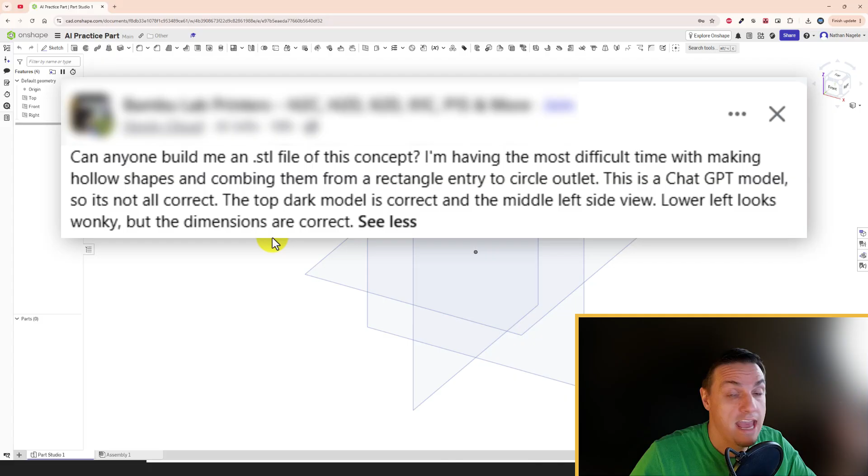Hey folks, I was in a 3D printing forum earlier and I saw somebody who posted an AI generated design, but they needed help creating it or making it go into the actual 3D printer. So we're going to look at the design, work on making it inside of Onshape, and go over some of the issues AI has when generating this stuff, but more importantly, how it can be used. I have a video coming about that next week as well. So let's jump into this and take a look at what's going on here.

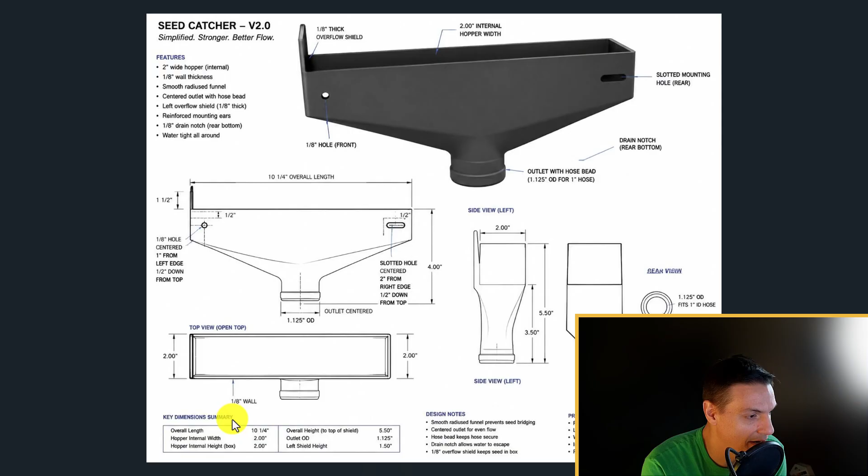Okay, so this is what it is. It's a seed catcher version 2. I don't know what it's for, it's obviously to catch seeds, but we need to take a look at a couple things to get started. Down here on the bottom it has the general dimensions: 10 1/4 inches overall. They say length, I would prefer width. The depth is 2 inches and the height is 2 inches. I'm also not a big fan of generating stuff that has fractional and decimal dimensions mixed. Keep it one or the other. It's a little interesting to see.

Overall the design, the 3D model, looks awesome, the generated thing, but there are some things we need to take a look at. First off, this picture is showing that this is a through hole. It's not indicated anywhere on the drawing that it's a through hole.

Secondly, we have our layout here. So this is supposed to be our front view. Below our front view is our top view, which is not correct. And then we have our left side view here, which really should be our right side view and should be in line with this. And then this is our rear view, and I don't know what that is or how that's actually the rear, because the rear view should be a mirror image of basically this thing. So that part's a little messed up.

The other issue we have here is this top view. This tube, according to the top view, shoots out towards the front of the object, and that's not the case. So we're going to go through the process of making this thing inside of Onshape. It's not terribly difficult, but we'll make sure we get it all solved here.

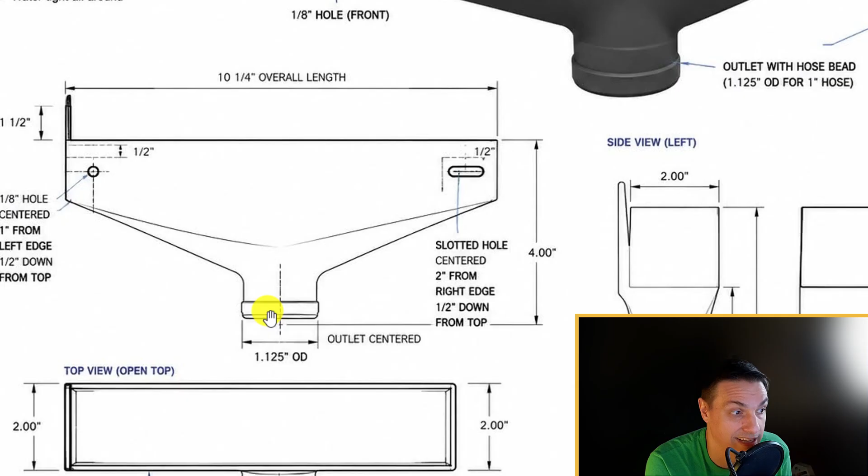Now, to start off with, before we do anything, we're going to break this down to basic shapes that we need to have, and then once we have the basic shapes, it gets a whole lot easier. If we take this as its most basic format, we're going to have a rectangle over in this area, and then the bottom area is going to be a circle or a cylinder. That's about all the stuff we need to have this thing set to begin with. We'll merge those shapes and get everything working, not a big deal.

But let's jump back over to Onshape, and we're going to flip back and forth between this and the other things quite often. Let's jump over to Onshape first here.

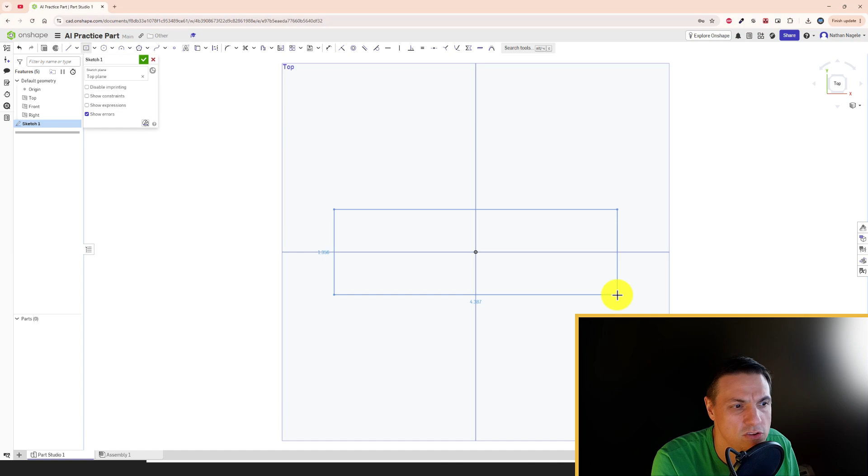All right, so the first thing we're going to do inside of Onshape, we're going to start off with Sketch, go to our top view, and rotate over to the top. I'm going to hit G for rectangle, or I might even hit R. R is a center point rectangle. It just helps keep things on the origin, which may be useful for us later. It's not super important, but I'm going to do it anyway. So we said it was 10 1/4 or 10.25 and 2 inches.

Going back into our drawing, that's what we have. 10 1/4 is the overall width, and the overall depth from front to back is 2 inches. And that's great. If we take a look here, we have the height of where this transition starts all the way down. They're not in proportion with each other of where this is showing it at and where that is. So we have to make a little bit of guesswork here. We see that the total height is supposed to be 5.5 inches, but that's not including this, which this one is including that. So again, there's a little bit of play in there that we'll have to make some assumptions or changes with.

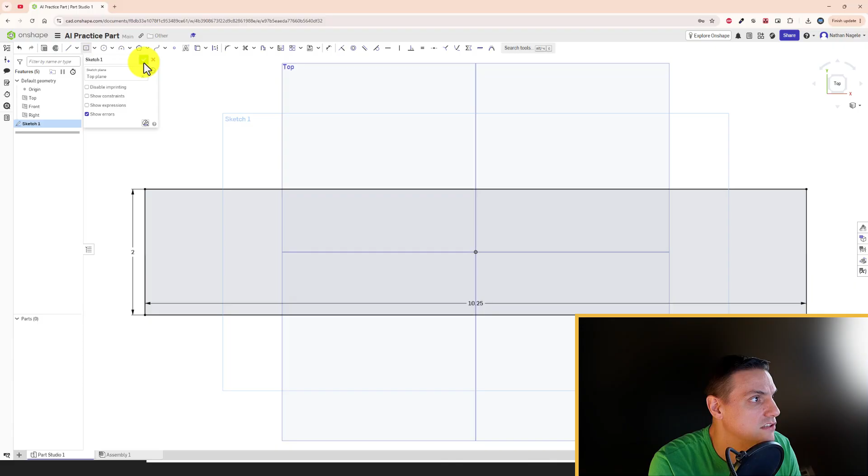But I'm going to say, if we have this as being 1.5 inches, and from here all the way to the bottom is supposed to be 4, basically we're going to have this thing go down to this area and then go beyond that. We have work to do. So I'm going to just make some assumptions. I'm going to say this is probably, if we take a look in proportion, 1.5 inches. So this is probably about 2 inches. So we're going to extrude that 2 inches, and then we're going to try to figure out what to do with this next part. So I'll hit my green check, go to extrude, click on my closed loop, which will turn gray.

And then I'll type in 2 for the inches and hit my green check mark. Now I'm going to turn off the different views here, or the work planes, because it's just going to be easier for me to work with them off right now.

The next thing we're going to do, we need to make that circle coming off of the bottom. We know from the top of this to the bottom of that it's supposed to be 4 inches. So we're going to make a work plane that from the top down to here is 4 inches away, and we'll draw our circle on the origin. That circle is going to have a diameter of 1 1/8 of an inch. So we'll get that going, and then figure out how high that's supposed to be up, and figure out the rest of it here in a second. But let's go ahead first with the work plane.

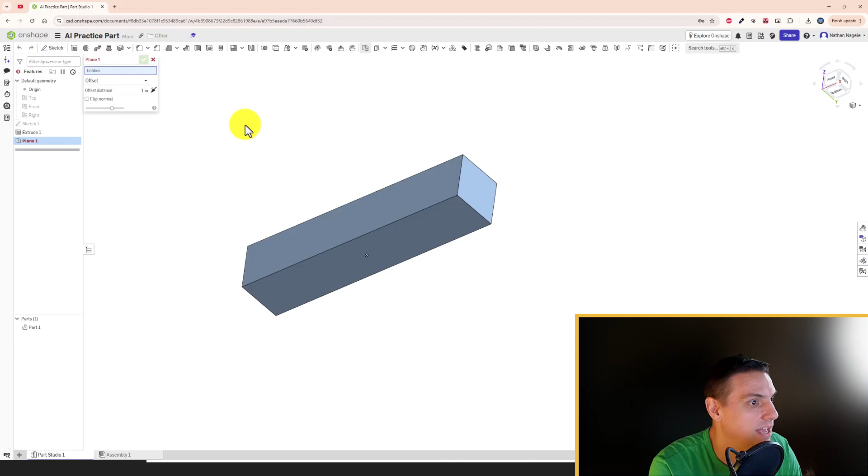We're going to go to plane, and then we have offset. I'm going to go from the top. We're going to change direction with the black arrow, and we would say that wants to be 4 inches away, just confirming the top to the very bottom is 4. So I'm cool with that. I'll hit my green check, and then we have a work plane.

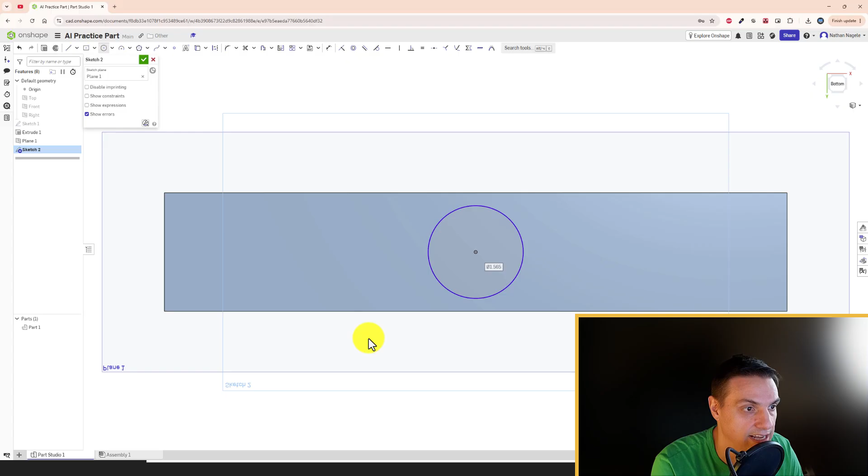Now I'm going to go to Sketch. I'm going to click on plane 1. We'll go to the bottom of the part, and this is why I made this centered on the origin, because then I can just do this, and it's telling us the diameter is 1.125. So 1.125, cool. That already looks visually not correct compared to the size here, but that's the dimensions they gave us with all that. And again, I don't understand this drain notch or any of the other stuff.

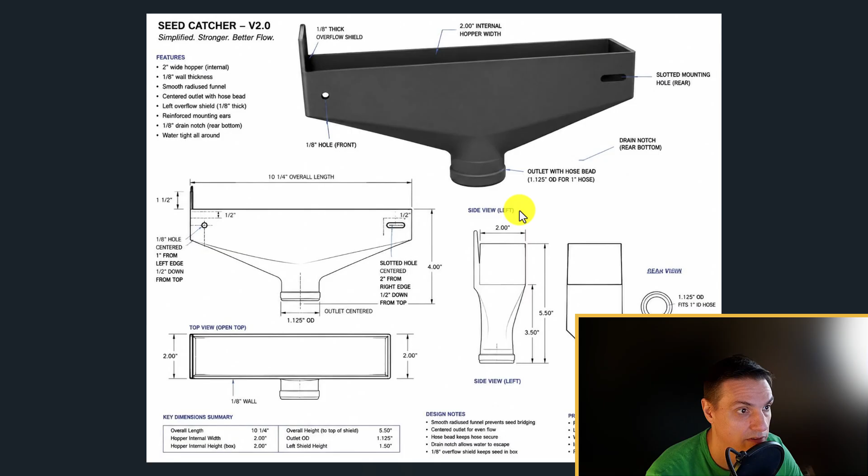So our next step here is figuring out how tall this is before that taper kind of starts. If we take a look here, it has the hose bead. It says it's 1/8 of an inch and 1/8 of an inch. So I'm going to assume each of these is 1/8 of an inch, adding up to 1/4 of an inch that we want to extrude this thing up by. So I'm going to finish my sketch, go to extrude, do that, and I'm going to do 0.25, and we got that. Now it's not perfect, we have some other work to do.

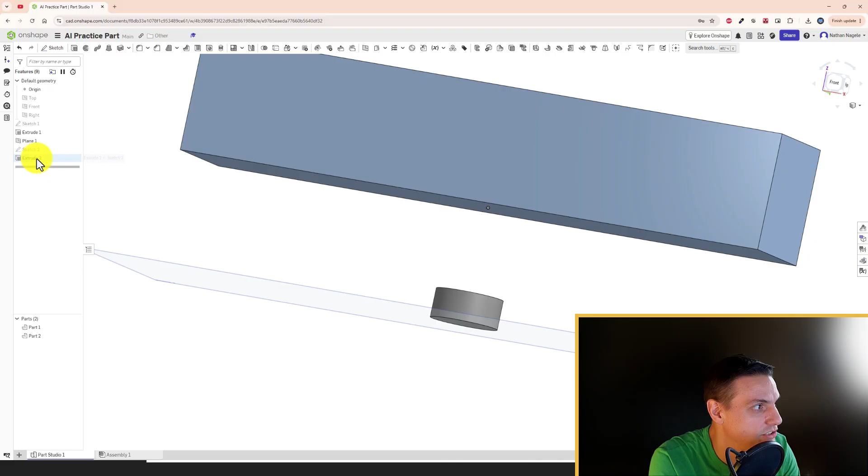And what we could also do, you see how there are 2 different parts, we generate multiple parts. There's other ways around that. I'm going to go back and delete these parts because I want to show you other ways to accomplish this same thing. So I'm going to do the same thing with this, except instead of going 4 inches this time, I'm going to go 3.5. That accounts for the height we're coming up. And the reason I'm doing this is because it helps keep the part more cohesive as we go through and build it. So 1.125, cool.

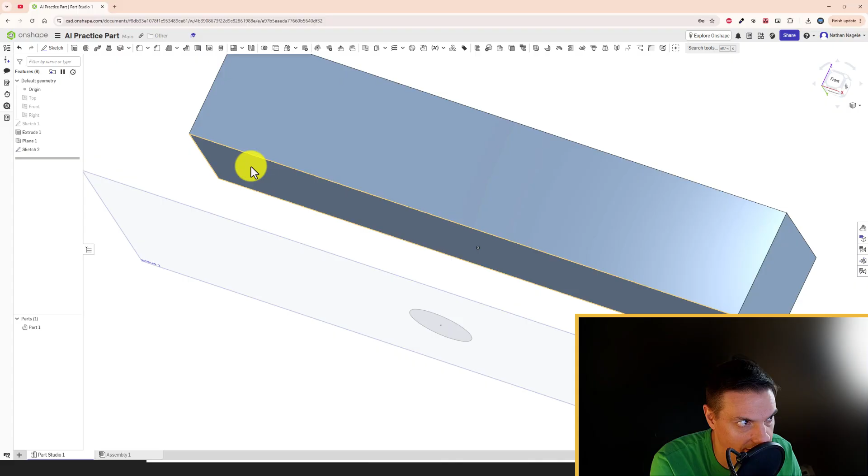Because what we're able to do now is project this rectangle down to that circle, and then continue that circle down farther once we have it in there, which is probably the correct order of operations. This is just one of the things you have to kind of play with when you're going through and working on a drawing that you're not quite sure of.

So to do this, we're going to go to Loft. Loft will be there, we have our profiles. We can just click on the bottom of the part, we don't have to draw anything for that. And then we're going to click on this, and you can see it's going to generate a shape where it merges those guys together. We'll hit our green check mark, and we have that there.

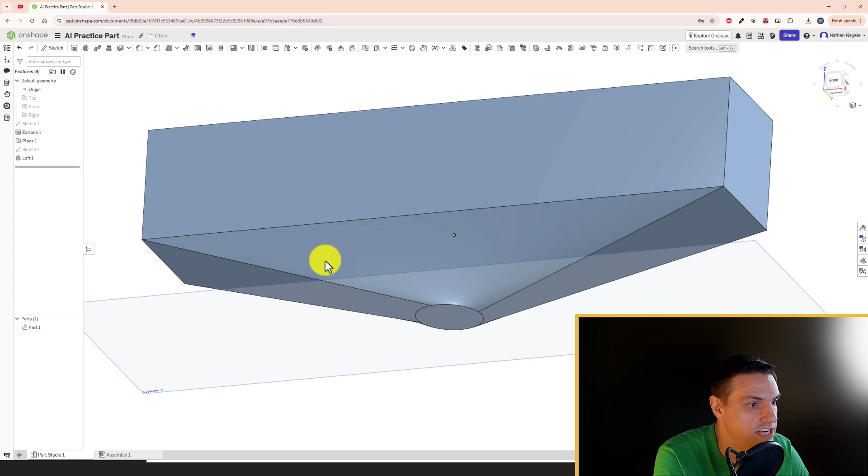Lovely, Bob's your uncle. Let's go ahead back on the sketch. We'll click on this now. We'll click on our circle on the bottom, and we'll get that to go out 1.125. Fantastic. And now I can just extrude this down that 1/2 inch. We still have some more work to do, but that's fine. All right, I'm happy with that as a beginning point.

Let's go back here and take a look at this. So it's supposed to be 1/8 of an inch thick and 1/8 of an inch tall. Okay, a lot of this stuff doesn't give me a lot of information because it says it fits a 1 inch diameter hose. Is that hose supposed to be internal or external? If it's internal, why is there this ribbing here? I don't know what's going on with all that, but I guess we'll figure that out as we go forward.

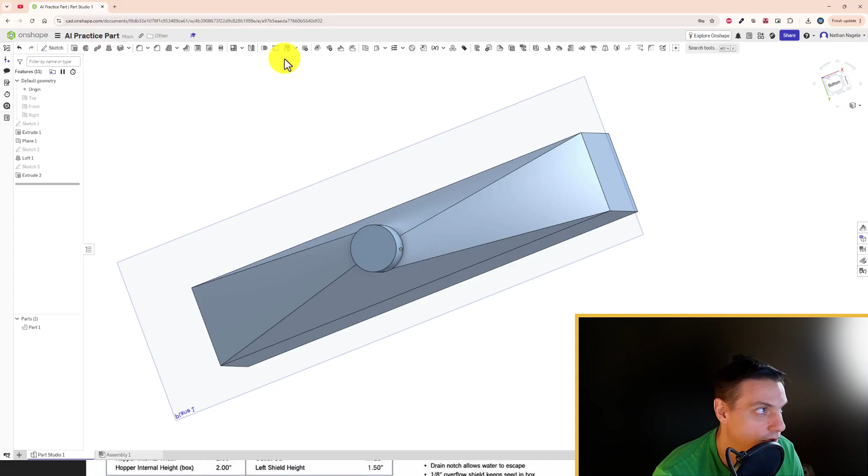So I am now going to sketch on this, go to the bottom again. We're going to do 1.125 plus 0.125.

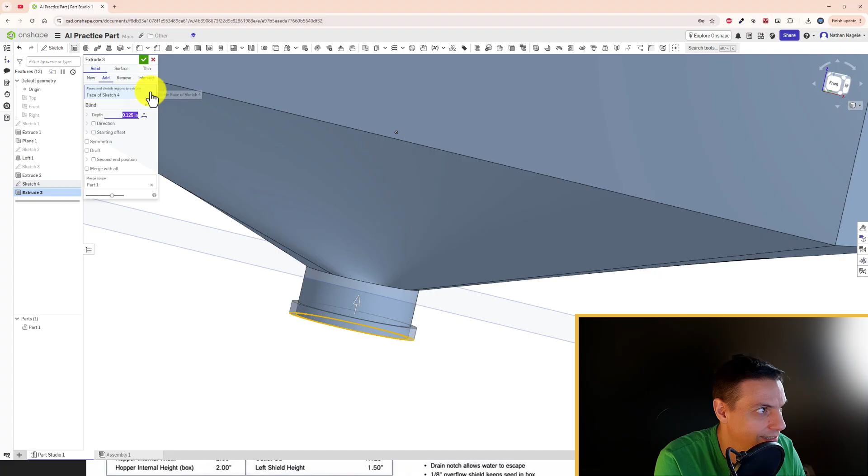Actually should probably be 1/8 of an inch, but we'll leave it as is for now. I'll hit my green check, and we're going to extrude this, and we're going to move it going upwards, and we're going to do that 0.125. I'm actually going to do a 1/4. I think that's going to fit better with what the design looks like it's meaning to do. And then we have that there.

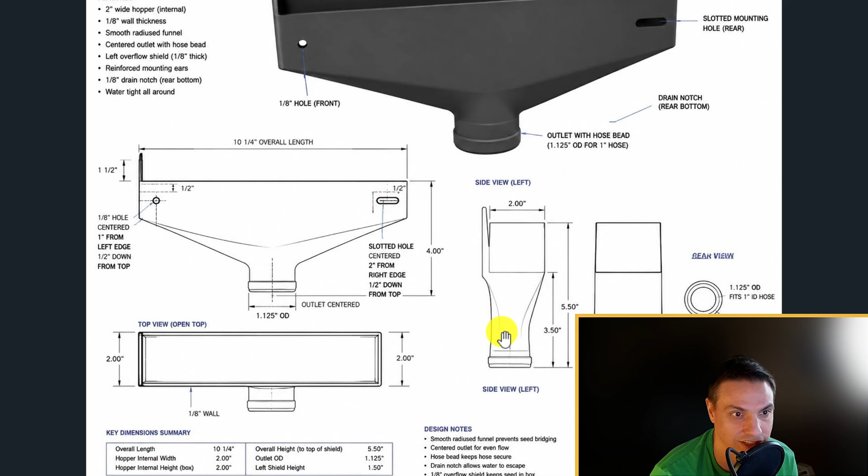All right. So we have the beginning stages. We don't have any of the detail work. We don't have the slot. We don't have the hole. We don't have whatever this thing is. And I don't know what's going on with this drain notch. I'm assuming it's somewhere on the side here. We'll figure out what's going on with that, but we'll go through and get that solved here in a moment.

So the next thing we need to do is, you can see this whole thing's hollow. We need to make it hollow. So to do that, we're just going to go to the shell tool. Shell tool is found up here. All we're going to do is say, hey, we want 1/8 of an inch on this face, and we want it going all the way down to that face. And we're going to see if it wants to work for us. This red's telling us it's going to be a problem.

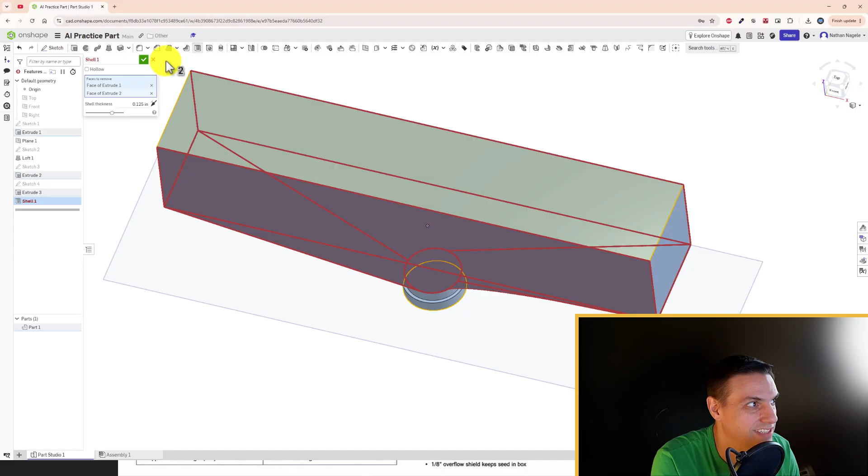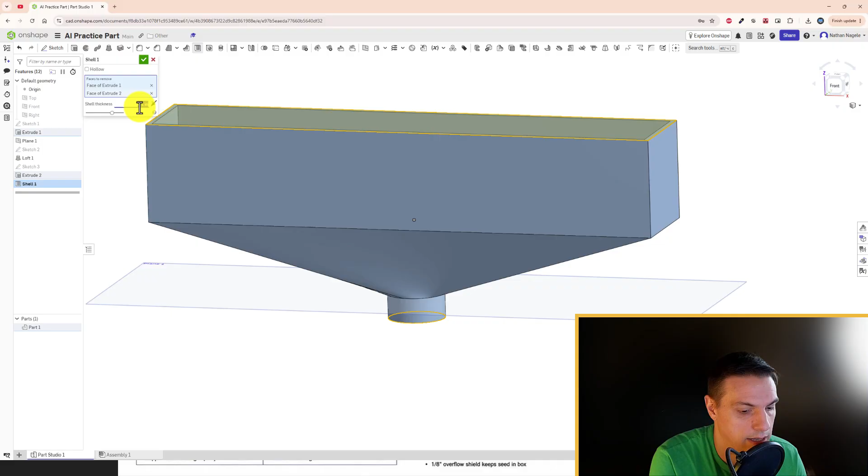So if that's the case, we can just back this up here. So we're going to delete the shell. We'll delete that extrude. And we'll delete that. And we're going to see if we can shell this one now without those pieces on there. And if they continue to be a problem, we can go back and work on it. Whatever. So let's go back over to shell. Click on that. Click on that. There we go. And 0.125. There we go.

All right, for this instance, we're just going to keep it at a 1/10 of an inch because it's working. I'm not sure, bringing that up another 1/4 causes it. You see how it fills in there? But we're going to leave that as 0.1 and it will be fine. We'll just deal with it.

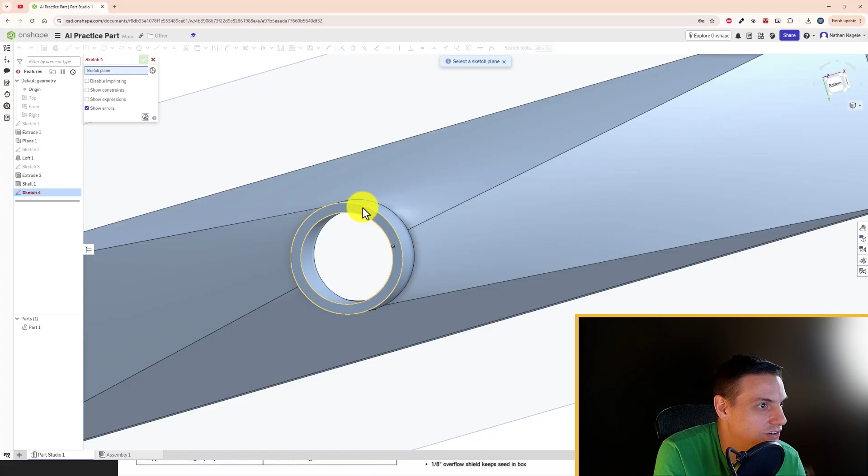All right. So then we'll go back and sketch on here. We'll add on that extra diameter, so 1.125 plus 0.125. I know it's a 1 1/4, but sometimes I like to just let it go and do its thing. All right, so we'll go there. It's going to be 1/2 inch, as we said. Or no, excuse me, 1/4 inch, my bad. And we'll move that upward. Okay, that's fine. It's not perfect, but neither is our drawing.

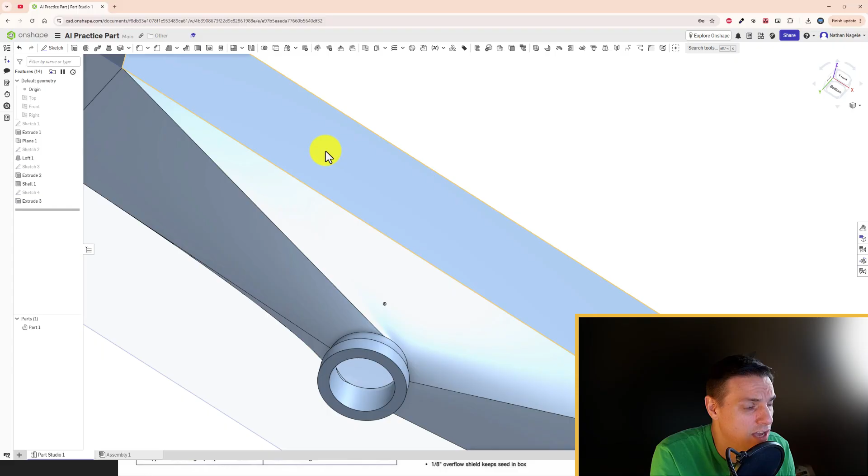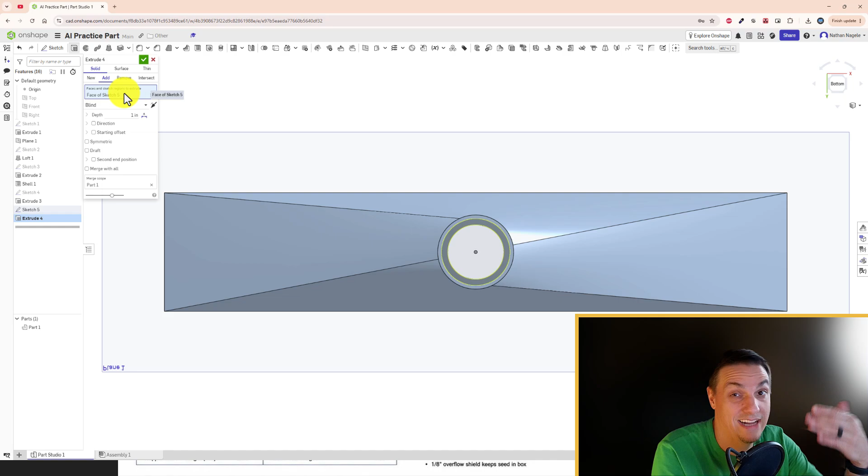This is the most difficult part of this whole thing because it's the least detailed. We can see all the lines, but we don't really know what's going on with that. The only thing we do need to make sure we do here is, and again, this is a quick and dirty trick, but I need to make sure that it is 1.125. That's what it says very specifically in the drawing. Because we had to change the thickness of the walls, I want to make sure this part's done. So I'm just going to go remove through all, and it will cut out the hole that makes sure that fits the proper size.

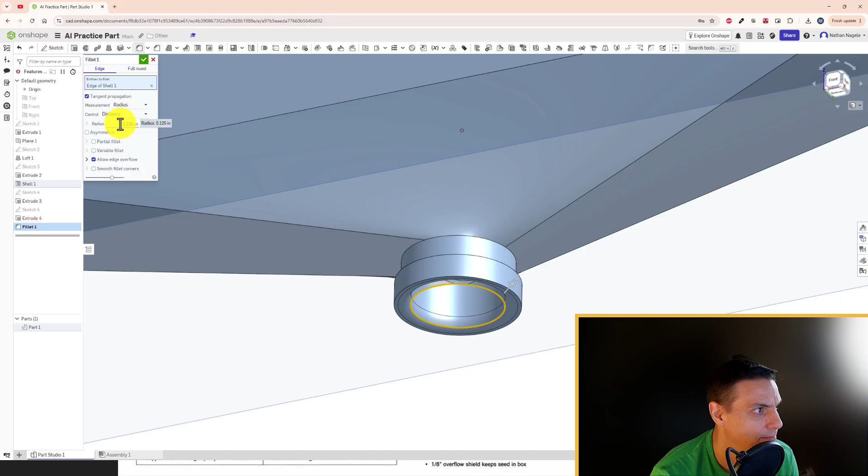So that's fun. I also kind of like how it spins in there. That's kind of neat. Let's go ahead and talk about some other things that we need to do before adding the last few pieces here. The first thing I want to do is I'm going to add a fillet or chamfer to the inside edge of this. I'm going to bring it down to probably a 1/16. Just in case the hose is going in there, we want to make sure it's easier to insert. The same thing on the top. We may run into issues like that, so I'm not going to do that there, but we can do that later.

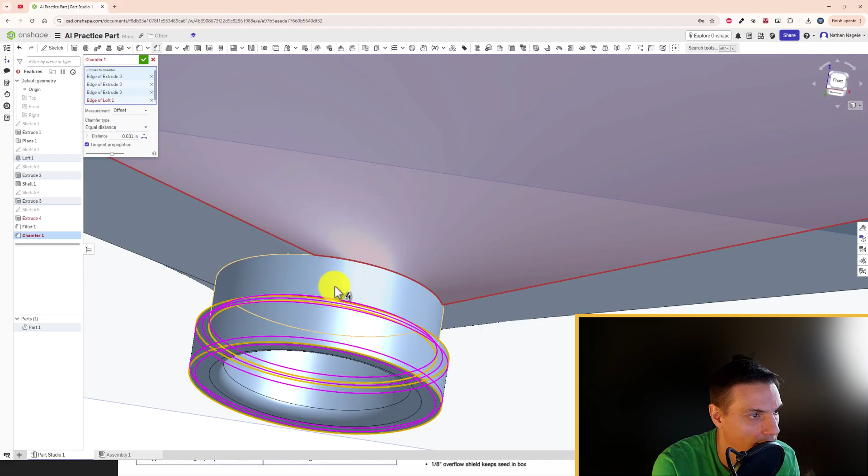And I'm going to do the same thing to the outside, but I'm probably going to do it with a chamfer. So I'll add a chamfer here of, it looks like we're going with a 32nd, which is totally fine. We got that, and that's not going to like that, so we'll do that. There we go. Now that's looking a little better, more like what we meant. And then we can go in and start adding on the final pieces.

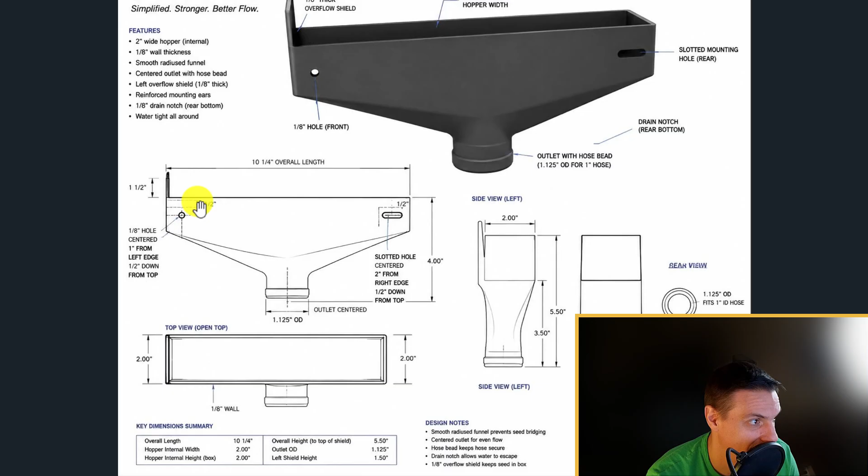So let's go ahead and sketch, click on this guy. We know based off of this, we have a circle. Oh, maybe that hidden line there is the drain hole. I honestly don't know, but there's a dimension going to nothing. Do you see that there? There's nothing associated with that. But we have an 1/8 inch hole centered 1 inch from the left edge and 1/2 inch down from the top. Okay. So that's our first step here.

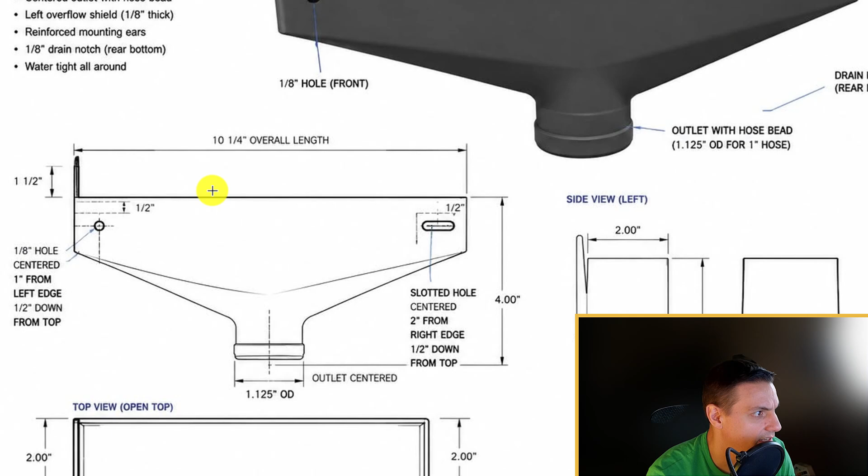We're going to sketch right on the side there. And we're going to put in a circle. It's a 1/8 inch circle, so 0.125. Said it was 1/2 inch from the top and 1 inch from the side.

So we'll do that, and then I'm just going to not sketch. We're going to go extrude, click on this, remove, and distance is through all according to that drawing that we have there. All right. We need to put on the slot. It has the same kind of thing. It's centered, it's 2 inches from, yeah, these dimensions are rough.

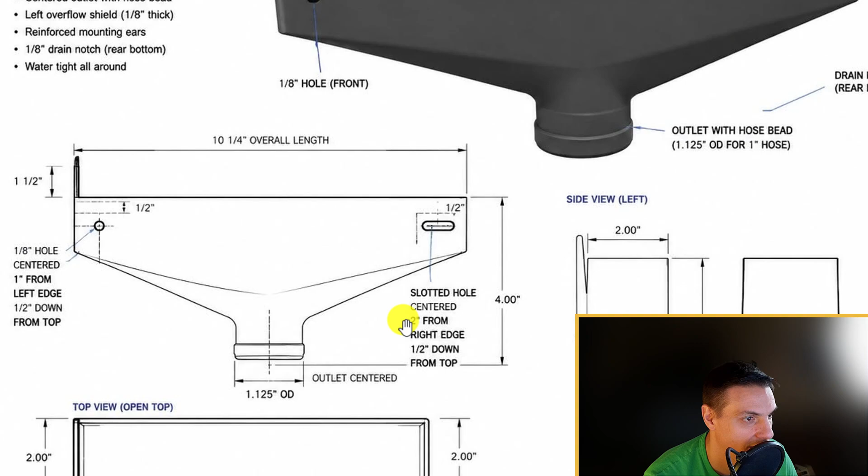All right, slotted hole, centered, 2 inches from the right edge down, and it doesn't tell us at all how big that slot is. I have no idea how big it is. It looks like it's roughly an 1/8 inch tall, and maybe we'll go with a 1/2 inch because that's what we have. I don't know. So we're going to play with that.

Let's go back into sketch here. We're just going to go with a rectangle. We'll draw that. I'm going to make it 1/2 inch. There we go. It's going to be, what did we say here? It says it's a 1/2 inch, 2 inches from the right edge and a 1/2 inch down from the top. Okay. So we'll go to dimension. We'll click on that and that. You're going to be 2 inches over, which seems excessively far compared to our other stuff. And, oh, 1/2 inch. That's right.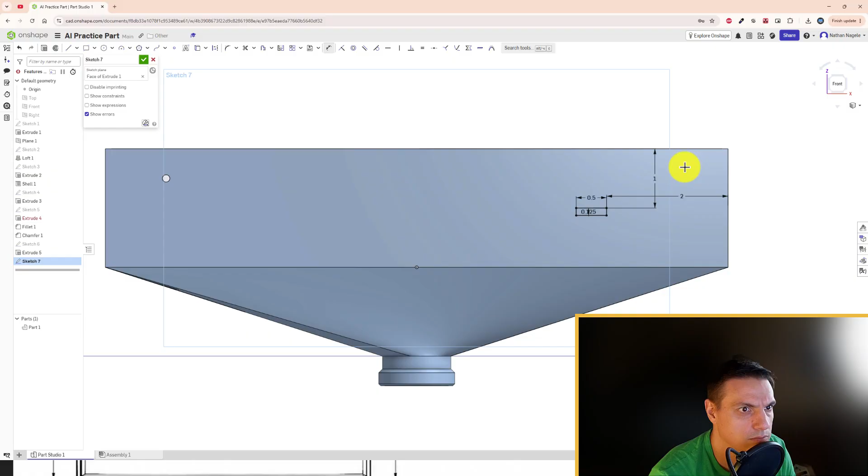There we go. Okay. Now, we want to go through and slot these out. There are tools in here for slots. I prefer to just do it this way. I don't know why. It's just how I've always done drafting stuff. We have that, and then I can hit M for trim and get rid of those pieces there. So that slot is in there.

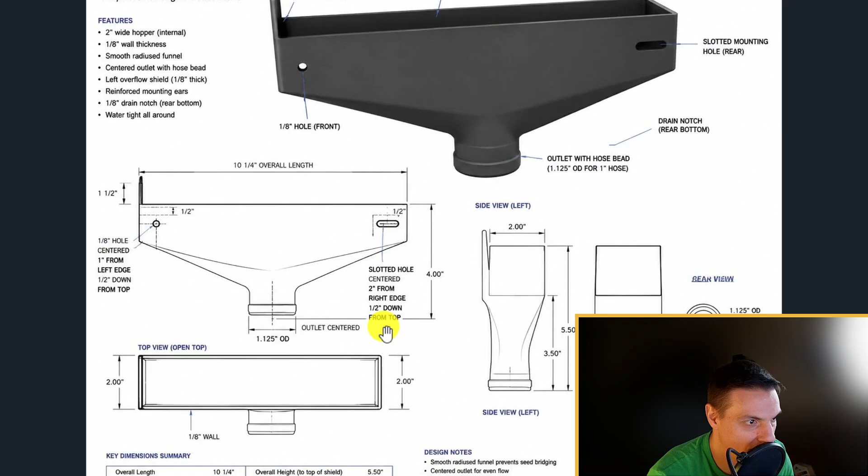Again, that slot looks way more over. Maybe it was supposed to be a 1/2 inch from this side over. So instead of dimension from here to there, maybe that was supposed to be the 2 inch. Ooh, hold on. Let's back up here. Let's get rid of this dimension and redimension this line to there and see if that does. It's closer. It's still not right, but it's closer.

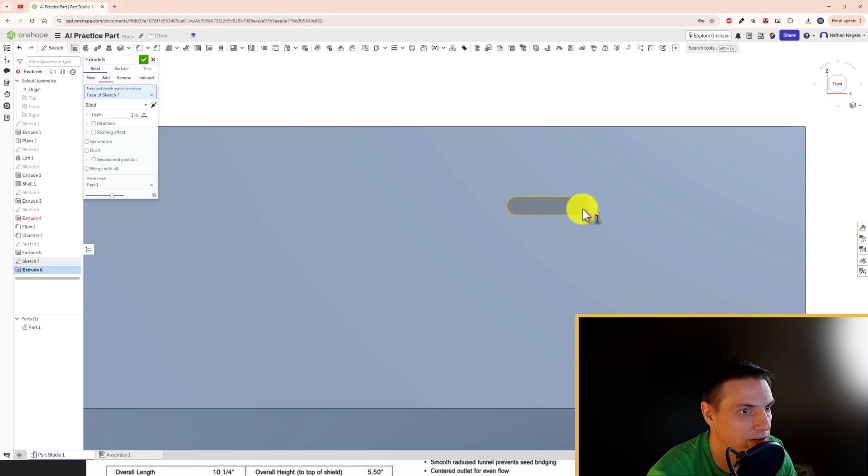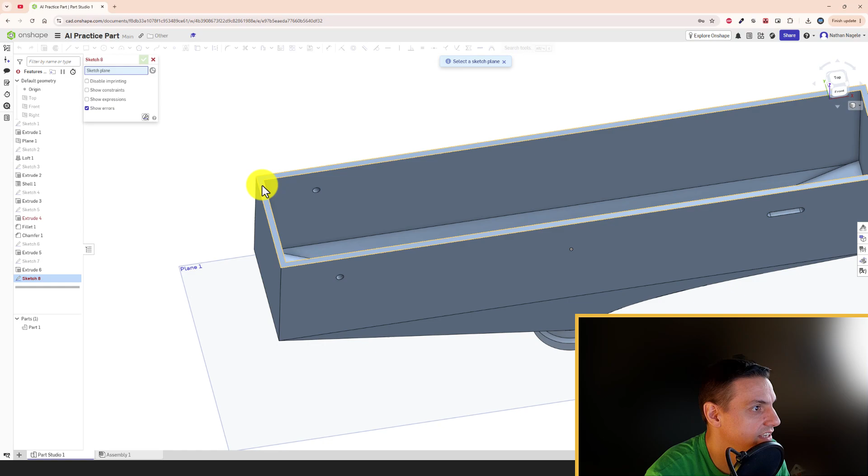All right, then we're going to cut this part out. Remove, we're just going to do the 0.1. So that's the thickness of the wall. Got that. So that's through now. And then the last piece that we have to do is this little guy. It's 1.5 inches tall. It has a shield, and it's 1/8 of an inch thick. We're not going to make it 1/8 of an inch because we're just going to build it straight on top of this. So we're going to sketch on top of here. It's going to be off by just a little bit, and I'm okay with that.

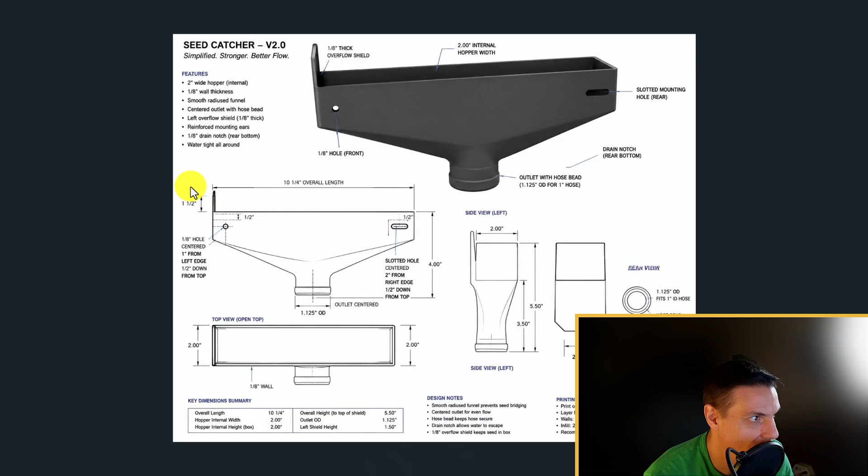We'll go to G for rectangle. Did that. We're going to extrude this whole thing up 1.5. So we have that there, and it looks like it has a little bit of a taper or rounded edge to it, so we'll add that on, and then we should be in real good shape. But let's go ahead and get that fillet on there. There and there. Cool. We're going to make that, I don't know, 1/2 inch? Yeah, that looks fine. Okay.

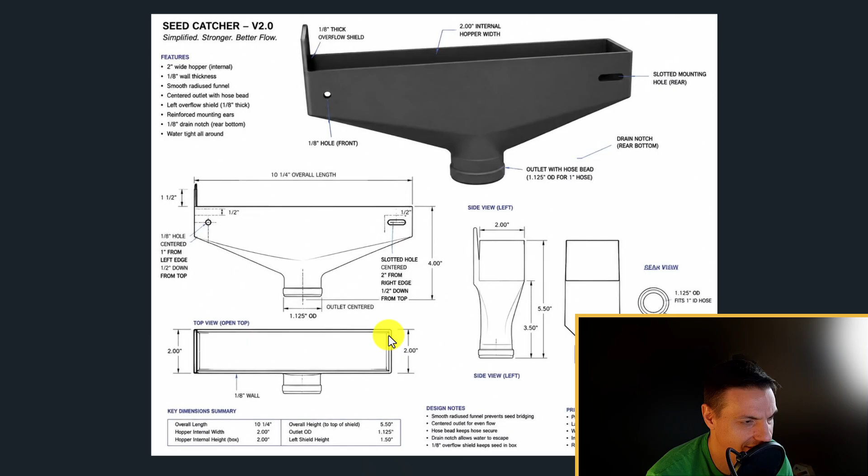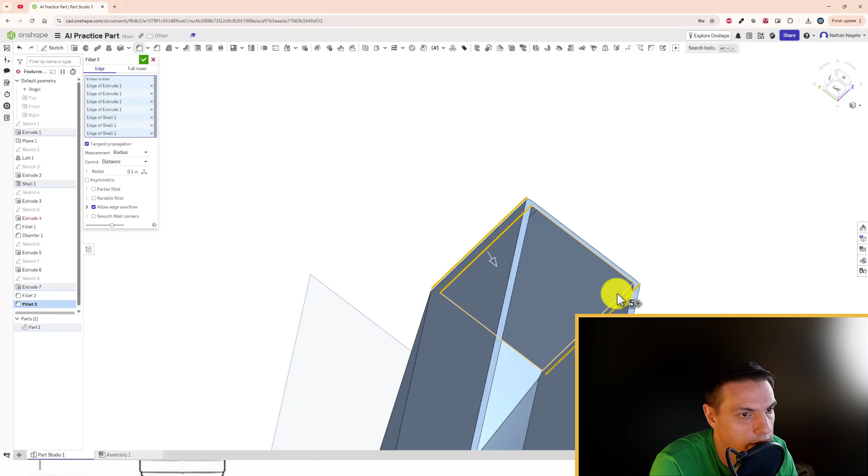Now, according to the image here, we have a bunch of rounds. It doesn't necessarily look like that. There's a few, I guess, if you look really closely. So we're going to add some fillets to the outside edges if it allows us. If it doesn't, there are other ways we can go about solving this, but we'll do the basics here. So if I do that, that, and that. And then we're going to come in and do the inside edges as well. 2, 3, and 4. Boom. All right. Now, we have that in there.

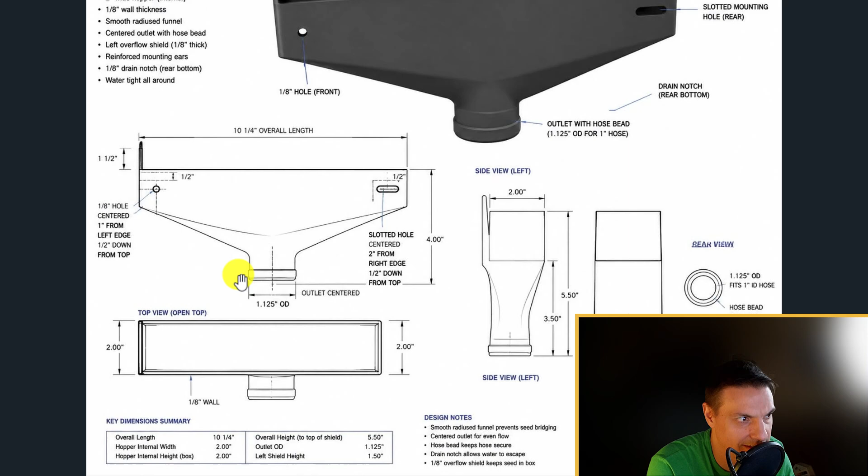I'm going to turn off, where's this plane at? Plane. There you are. Go away. All right. So if we take a look, we pretty much have what's there, especially if we go to our front view. Is it exact? No, this distance is not correct because the measurements that they gave us are not correct.

This is the best approximation I can come up with while looking at this thing, and it largely solves most of the problems. We can really fine-tune this pretty easily and get it set to where we want if we had more precise dimensions. But because there's some conflicting things or some missing details, we can't go fully in it, but we get that solved.

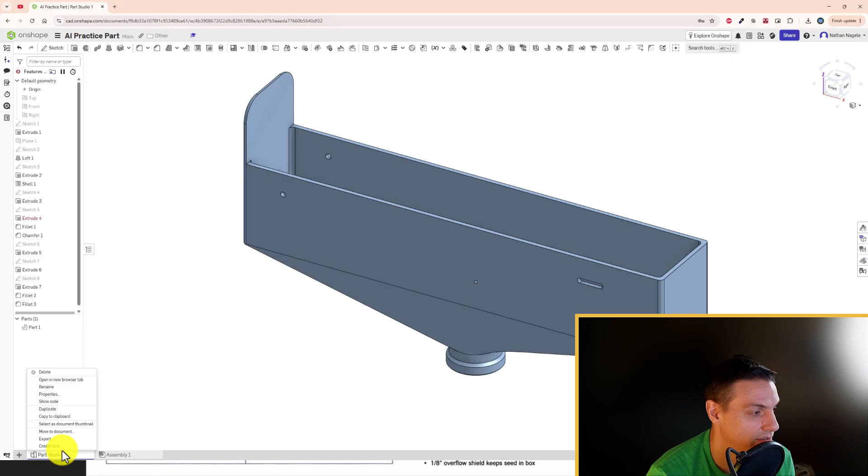And then all I do for 3D printing is right-click on this, go to Export, we select our STL file, give it a name, make sure it's in millimeters, and export it, and we have our STL file done. So you can absolutely take generated things and make them three-dimensional, make them ready to print very quickly and very easily. Just make sure you know exactly what you're looking for when you're doing it.